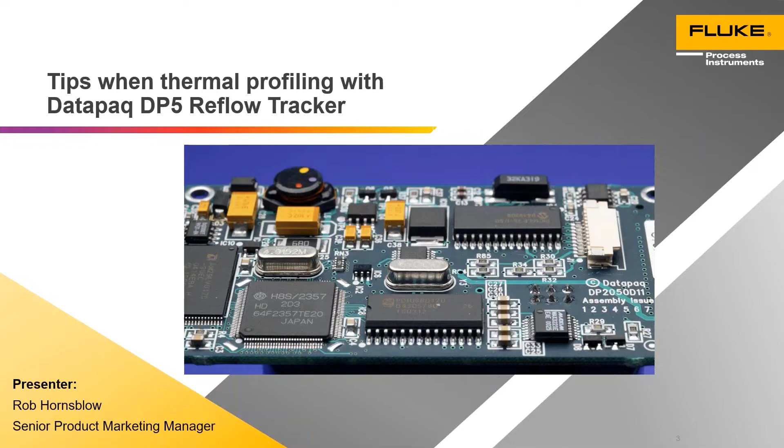So before we dive into the detail around reflow soldering, I do have 2 slides of corporate presentation just to show where Datapaq fits within our larger organization. As you will have noticed, all of the slides have a Fluke Process Instruments logo.

Datapaq, founded in 1984 in Cambridge in the UK, focused completely on design and manufacture of temperature profiling systems. And our R&D teams for mechanical, electronic and software disciplines are still based here in Cambridge, along with our order management team for Europe and Asia.

And we started out making these profiling systems for use in the coating industry, as one of our founders came from that industry, in particular around coating the insides of beverage cans. And the issue there was around coating adherence to the metal, and I don't want to say arguments, but discussions that took place between coating suppliers and applicators when they came to troubleshooting the process.

And I think all of you in the electronics industry see it similarly, where often the expertise of the paste supplier is called on to assist in the process of troubleshooting, and that's directly analogous to the coatings industry where we started. We've also taken that concept and applied it to industrial processes from cooking chicken, right through electronic soldering, heat treatment of steels, through to the high temperature firing of ceramics.

And Datapaq, along with Raytek and Ircon, was brought together in 2015 under the Fluke Process Instruments banner. So we all operate under the Fluke Corporation, which in turn is owned by Fortive, which is a large industrial group with over 20 operating companies and 24,000 employees around the world.

So I alluded to this earlier. Datapaq divides the whole heat treatment world into 6 segments. And today we're really focusing on this one around the electronics industry, and even more, the focus is really around the use of temperature profiling in reflow soldering ovens. We also have systems that can be used in vacuum soldering, vapor phase soldering, wave soldering, conformal coating curing. And some of the points discussed today will be common to those other mass soldering techniques.

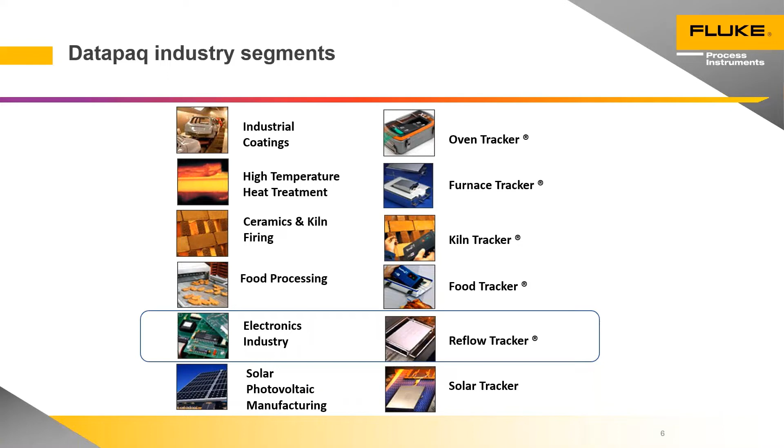Measuring product temperature in reflow soldering is great, and most people are using golden boards to do this with thermocouples attached to them. But there is a degradation in those boards when they're used 10, 20, 30 times. And products like the Surveyor that are available from a number of suppliers have fixed sensors that enable you to get a more stable measurement system. And then at the bottom, a range of accessories for measuring those other processes.

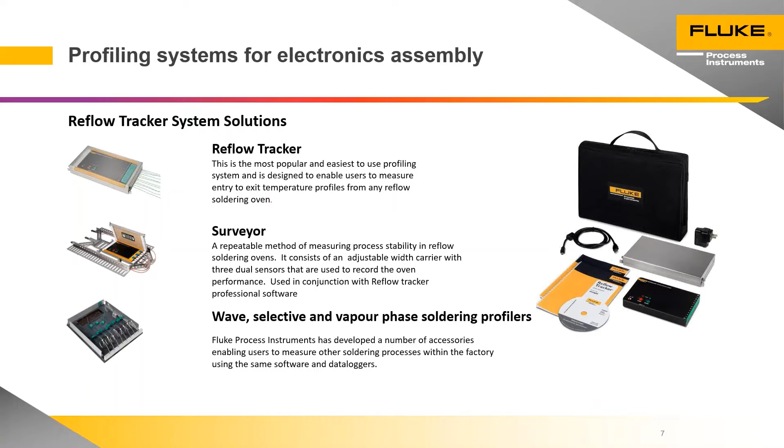Okay, in detail, a quick slide to talk about the data logger. The Datapaq DP5 is a battery-powered data logger designed specifically for use in the electronics industry. It's, I think, the third or fourth generation of data logger for this industry. It has some features that the previous generation didn't, and it was particularly designed to keep cost of ownership low.

So this unit will recharge its battery from any USB outlet via a standard USB cable. It uses off-the-shelf Type K thermocouples that can be obtained anywhere. And the battery itself is user replaceable. So when it does eventually get tired, as we all do, it can be replaced by the user, and no calibration or information in the logger is lost at that point.

Around the battery, this is one of the issues with data loggers. We can fully charge the battery in 90 minutes from discharged, and there's a fast charge controller in there that will measure the current going into the battery and also the temperature of the battery. But if you purchase a very low cost USB cable, you'll find the wires in the cable have a small cross section, and then fast charging through that cable becomes difficult.

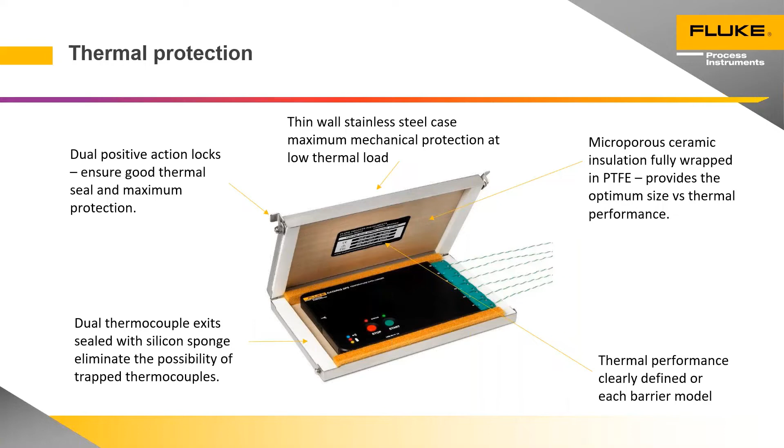The degree to which it's compressed controls the size of the cavities between the spheres. And there's very careful control on the compression to ensure that convection within those cavities is reduced to a minimum. And to reduce any radiative heat transfer within the material itself, the spheres are coated with a reflective opacifier. So that's how the microporous insulation in the thermal barriers is working to reduce as much as possible heat conduction through to the data logger.

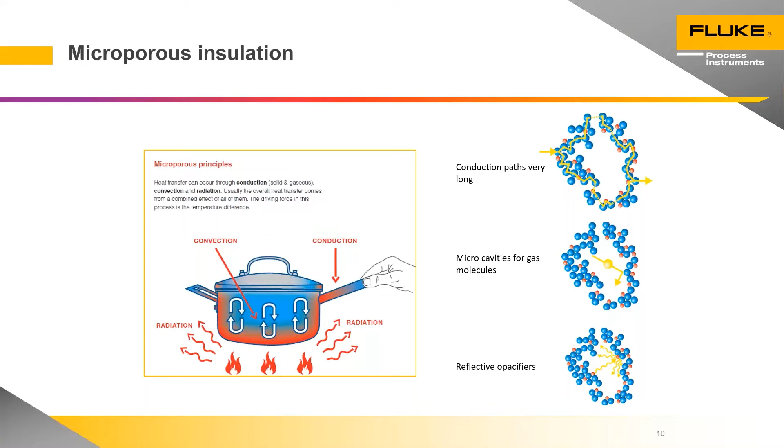When we did exactly the same thing, but placed the data logger on a thick steel plate, a nice cool surface, it cooled down in 3 minutes, or 3.5 minutes. So you can see, once the data logger is out of the end of the oven, place it on a cold conductive surface. If you've got one available, that's great. If not, put it over some fans. You'll cool it down in 3 or 4 minutes, which, by the time you've downloaded and had time to analyze the information, you can be ready to conduct another profile run.

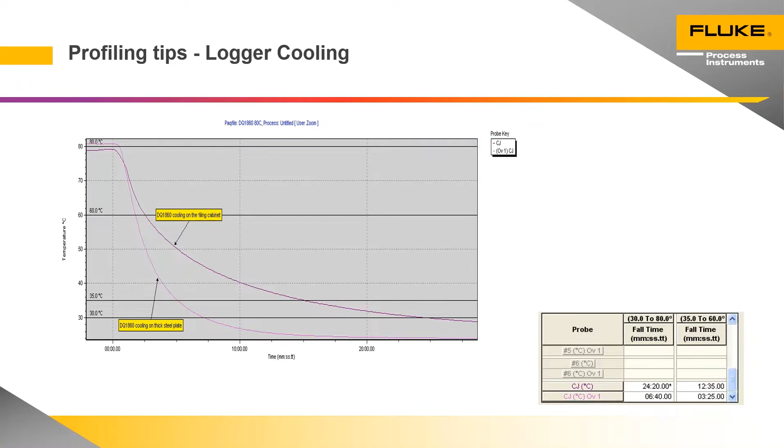And finally, within the software, there is the ability to prevent the logger being reset if it hasn't cooled down. It's not set up by default, but you can go into the options of the software and set yourself up a limit so that if you have inexperienced operators using it and they have a tendency to put the data logger back around the system before it's cooled, you can set this up and prevent them damaging the logger by putting it back through. This will actually prevent it being reset and provide a warning to the user.

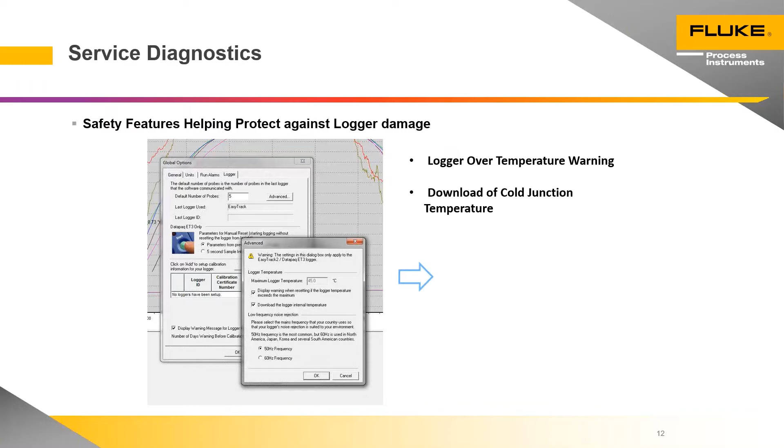Okay, that's my slides on thermal protection. It's an important subject, even though this is low temperature. We do see a tendency for people to overuse the systems.

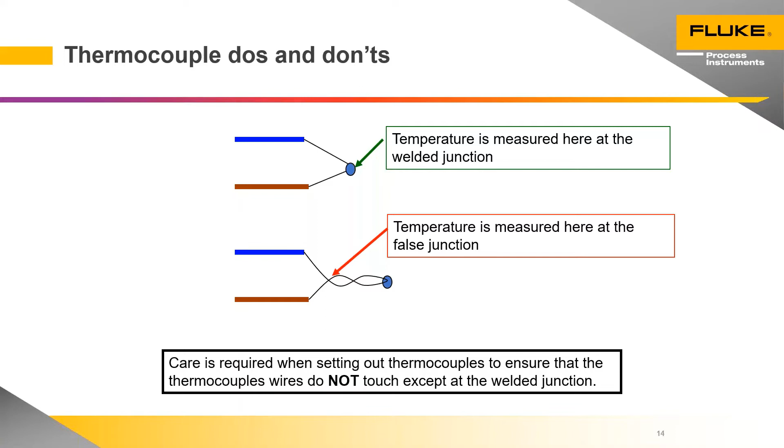Some do's and don'ts with thermocouples. It's typical in the industry to connect a number of thermocouples to a golden board and store it in the cupboard and use that when you come to make another batch of that particular product. When a thermocouple breaks, there's a temptation just to twist the wires together and stick it back on and do the profiling. That works, but you must understand that the temperature is measured at the first point that the two wires of the thermocouple touch each other. So if you've made a long twisted junction, which is nice and strong, and you've done many, many twists, the junction will be measured away from the tip. So just take care. If you get some surprising results that look somewhere between the product and the air temperature, and you've got a twisted pair thermocouple, this is quite possibly what's happening.

One of the best ways of attaching the thermocouple is to use solder. I'll be honest, it's a horrible task. Type K thermocouple wire is very difficult to tin. You'll need an aggressive flux to do it, and you should be using a high lead solder, which in an unleaded solder manufacturing environment is also something that many people don't want to use. But there are a number of people around the world using this. It does provide a very repeatable measurement.

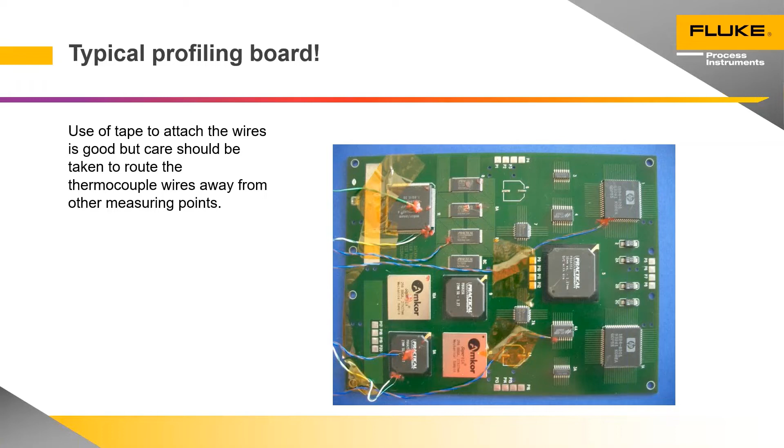Moving on, I'm now going to talk about some of the software features. So we've covered the data logger use, the correct use of the thermal barrier to ensure you're not overheating, how to cool down the logger, how to attach the thermocouples, and now it's how you use the software to get the best out of the results you've obtained.

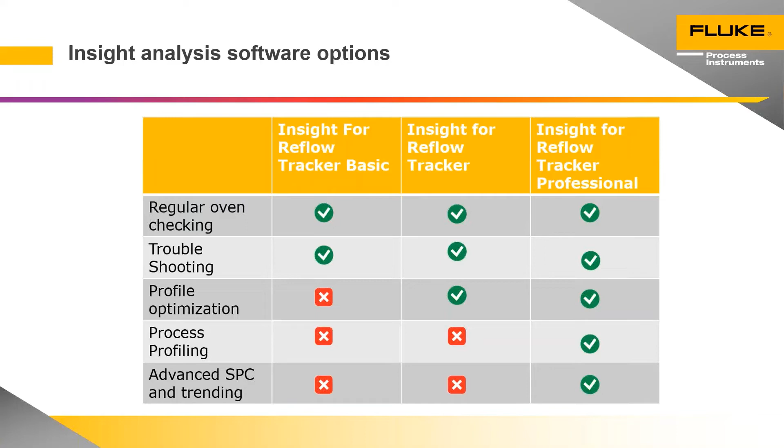There are various software packages available, from the very basic, just for regular oven checking with a time temperature curve, through those that contain some profile optimization or profile prediction, to the professional softwares that have SPC monitoring and profile or recipe setup and calculation systems within them. I'm going to cover profile prediction, recipe generation, and statistical process control in the next 4 or 5 slides. So this is really an introduction to the topic. I suggest that you go and read up around it afterwards if you're interested in using these features in your day-to-day profiling.

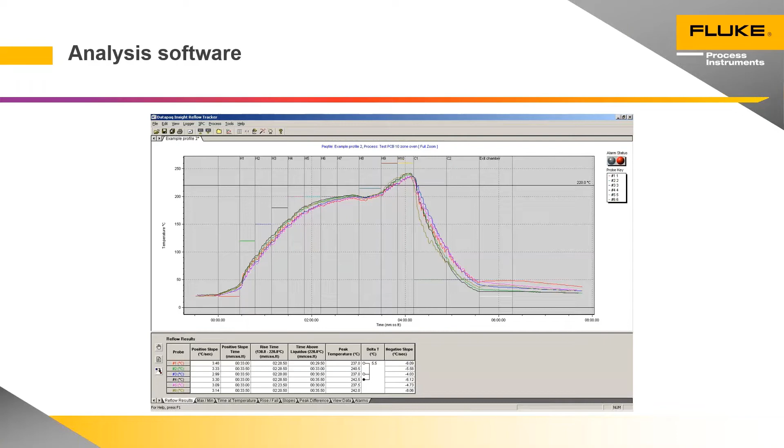Setting up this information around oven zones and recipe settings does take a little bit of time to invest up front in what we refer to as a process file. But once it's been done, that unlocks the power of the software to do profile prediction and the recipe calculations. So this enables you to set up the oven much quicker when you come to change product or change processes. So it's worth investing the time up front to define these oven zones and recipe settings.

In particular, the oven zones. This is the physical dimension, the physical length of the zones within the oven. So it's something you're only going to set up once. They're never going to change. Typically, you would measure the zones, enter them in the software, and save it with a meaningful name, like oven number 3 or whatever it is for your particular factory unit.

Or there is a library of ovens already built into the software, in which you will find some of the most common ovens. The second one on the list is the recipe. Now, at its most basic, the recipe contains the line speed and the temperature settings, which will be used by the software in profile prediction and recipe calculations.

It also includes some analysis. The software can automatically analyze the profile when downloaded and check it against a preset number of alarm levels. So you could set an alarm on peak temperature or time above liquidus. And these can be saved separately from the process file, because typically, if you're using the same solder paste on a number of ovens, you'll be checking the same profile criteria. So they can be saved here as a recipe analysis.

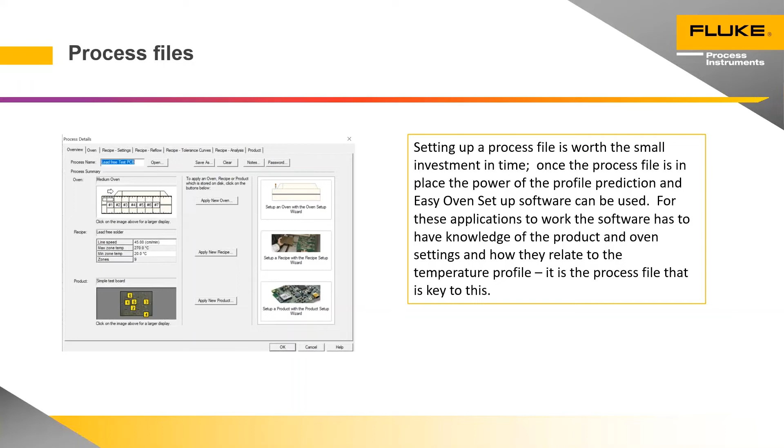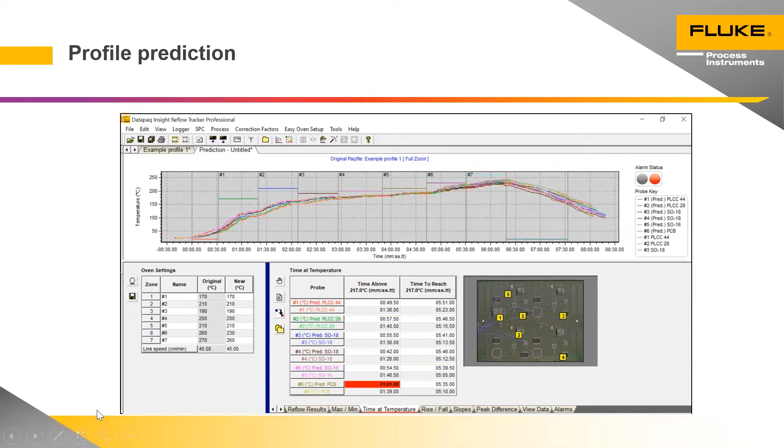It does take some operator experience to get through that and to try a number of scenarios. Another way to do it would be using what we call easy oven setup. Other companies have different names for this particular function. It's a recipe calculation based on the profile you want to achieve. Again, the starting point is the profile you've just measured on the circuit board. And we're back to that slide again. We have a time and temperature graph, and all of our thermocouples are out of tolerance.

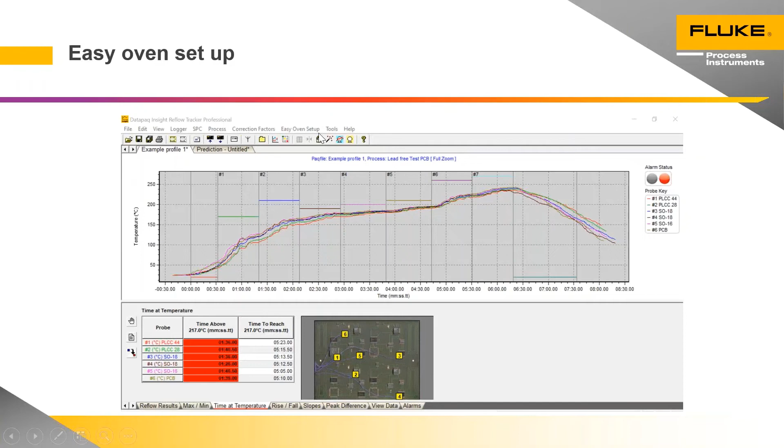If I come across to the easy oven setup, there's an option in here to set up my process limits. So I can now tell the software, I want a profile where my time above liquidus falls between these two times. These are my peak temperatures. I want a simple ramp profile, and here's the maximum slope that I can tolerate during that period. And I'm going to allow the software to look at different line speeds.

The original line speed on this profile was 45 centimeters a minute. I certainly don't want to go any slower than that, but I'm going to allow the software to choose some options between there to see if there's a better recipe that it can find. So it will go away now and do calculations on a number of different recipes and come back to me and propose some options.

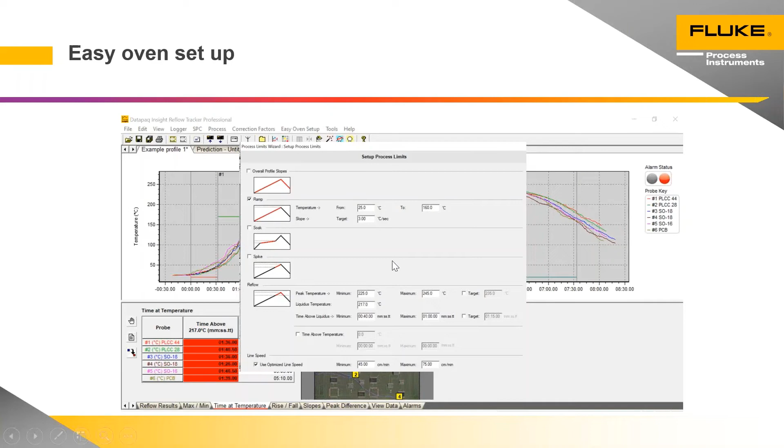So we didn't make the calculation happen. We've just clicked on to the next slide. What I have here is the software proposing some different recipes. And here they are ranked down the side with line speeds and mean temperatures. This is a kind of indication of whether the recipe is a hotter or colder recipe. Typically, slow recipes have lower temperature settings. And you guys know all this from experience.

But this is really to help out people that are having issues when changing or setting up an oven for the first time. Do that initial profile, tell it what you want to achieve, and the software's come back and predicted some settings here. Now, you will notice the first one at the top of the list is now very fast. It's 75 centimeters a minute as opposed to the 45 we were operating at. It does fall within specification. It would allow you to increase productivity.

Other options, I think the first option down here at 45, and this shows maybe some of the weaknesses of automated systems. It's showing a very high temperature on this first zone. I don't think that would be realistic for this particular oven. So you do have the ability to edit the recipes. I could come over here and use this as my starting point, edit it, and then I would suggest you do a confirmation profile.

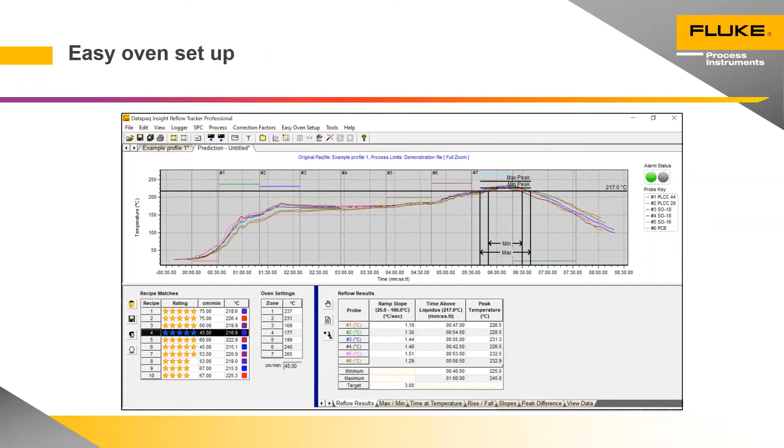So, assuming we've set the oven up for our new product, everything's working well, we're running it day after day, and we want to conduct some trend monitoring. The software has the ability, I wouldn't say this is statistical process control in all its glory. This is a very simplified trend analysis system. But you can go back and look at the results obtained over a period of time.

So rather than a simple time temperature profile for one reflow profile run, we could look back in this example over 20 different files taken over a period of months. And we could look at what was happening, for example, to peak temperature on each of the thermocouples over that time to see whether the oven's gradually becoming cooler or hotter, which might indicate a maintenance requirement.

Before we look at this, one thing just to say, if you're using a golden board to obtain this information, be very careful because you may end up measuring degradation in the golden board rather than changes in your oven settings. So before you start any statistical or trend monitoring, make sure that your measuring system is stable. The measurements have to be repeatable before you can do any analysis.

Okay, so assuming we've got a stable profiling tool and we've conducted a number of profile runs, you would probably do this on a fixed recipe. So this might be a daily thing. First thing in the morning, set the oven to a fairly cool recipe, the same setting every day, pass the tool through it, measure the temperatures, and then compare them that way. And the reason I say a cool recipe is that you can then set it to your operating recipe, which will be hotter, and ovens heat up far quicker than they cool down.

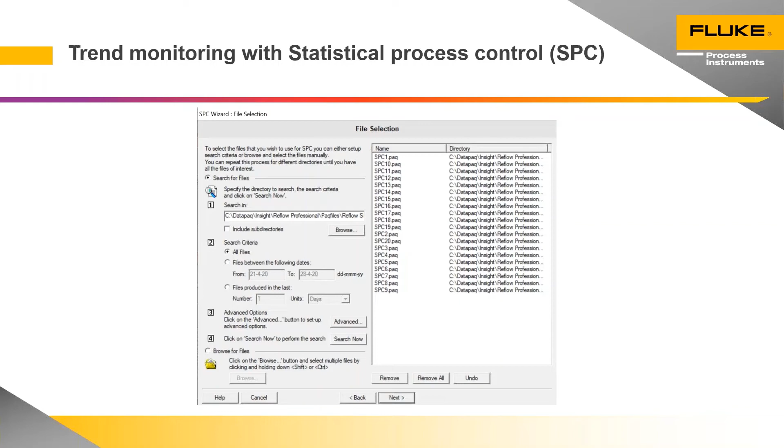So we've selected which files. You could select them over a date period or the last 10 files that you've run. The next step within the wizard is to check which of the analysis fields you want to measure. So this could be time above liquidus. For today's example, I've taken maximum temperature.

So I've taken those last 20 profile runs. I'm going to look at maximum temperature. The software proposes some upper and lower limits based on the temperature that it finds in the first file. You can override these with your particular control limits that you have on maximum temperature.

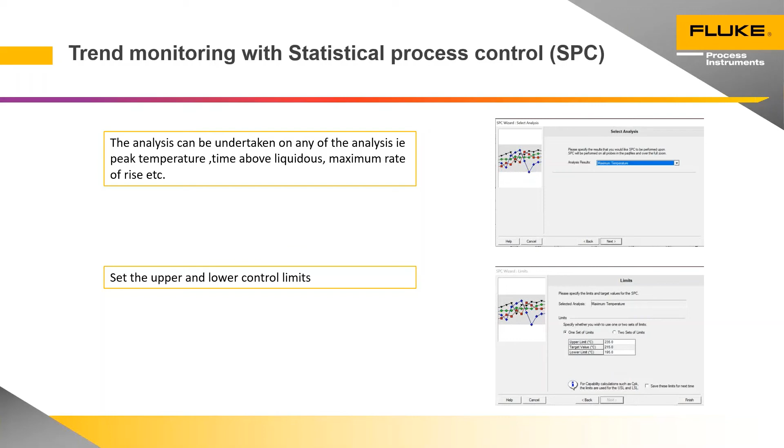And then you move on to the results graph. It looks like nothing else that you've seen in the software to date. What we're looking at now, each one of these points here represents a temperature profile taken. So this one was taken over a period of months, some years ago. We can see these 20 files, each one of these points represents a paq file.

And for thermocouple number 4, this one here, we can see the peak temperature measured each day varies quite dramatically. It's generally below the target, but it does vary up and down. That's got quite a wide variation. If I look at the green trace, number 2 here, I can see that there's much less variation. It's a bit closer to the target temperature, more stable results.

And these are reflected down here in the calculated CPK values. So these are measurements of stability of the process and ability of the process to meet the specification required. The exact calculation is detailed in the help text, but you can see here, thermocouple number 4 is a very low value. It's not particularly stable and it's not particularly close to the target.

Now, maybe that thermocouple is on the edge of the circuit board and you expect a bit more variability, or maybe it's poorly connected, or maybe it's a twisted junction and we're looking at variation due to the fact you twisted the wires together. So make sure you've got a stable measurement system before you start using the SPC.

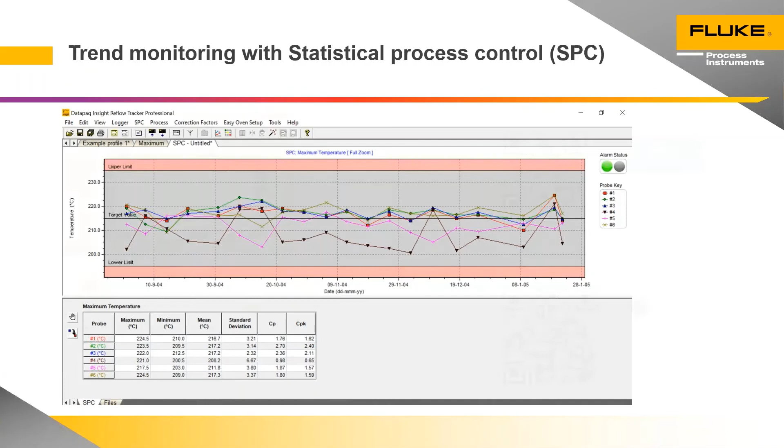One final thing before we go. There is an ability within the software to share results files with other members of your team. You can do this via email. And now we do have a basic viewer available so that if you send the Datapaq file to someone else who doesn't have the software, they can freely download an app. It will run on iOS or Android platforms, and you can do a basic analysis of a graph.

You can zoom in and out. You can look at the individual readings, turn thermocouples on and off, and reshare it. You can email it and share it on from mobile platforms.

And just to share with you, we are developing this app further. So later in the year, this will make communication with the data loggers via the Bluetooth that I spoke about earlier. So you will be able to reset, download, and do thermocouple checking or real-time readings even using mobile platforms. So we can get rid of the need to carry that laptop PC down to the factory floor every time. You will be able to use mobile platforms to interface directly with the data loggers.

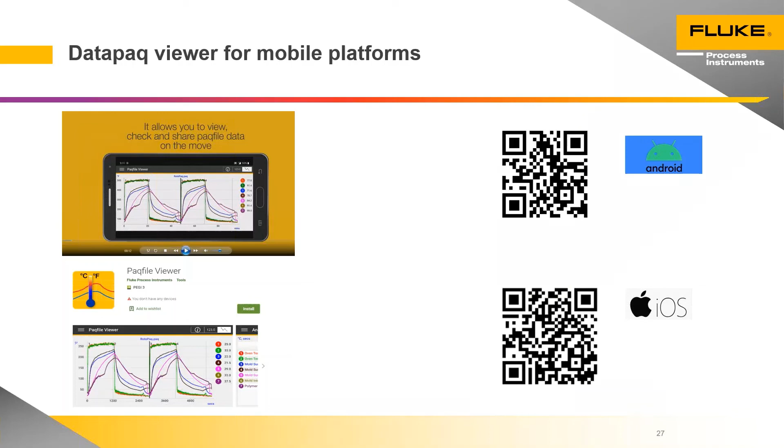Okay, that brings me to the end of my presentation for today. I hope some of it was useful for you. I hope some of the notes around ensuring the loggers are cooled down between use, some of the hints and tips there with the thermal barriers, you'll find useful.

And I await Matthias or Stuart to share with me any questions we've had in. Thank you very much for your time. Yeah, Matthias here. Thank you very much, Rob, for the very interesting and fruitful presentation. From my side, you mentioned a lot of details what my customers also frequently ask me during my presentations and discussions on site.

And additional to my comment, here are the questions from the attendees and the community. One is how to make an SPC for a specific temperature, as for example 100 degrees, and it's not the maximum and minimum temperature. I think they set up a special point in the software, in the profile, and then they want to create an SPC report. So is it that you want to measure the time above 100 degrees or the time taken to reach 100 degrees? Here it is at, for example, 100 degrees.

Okay, so in the drop-down menu, which I didn't show, so in the SPC analysis where I chose maximum temperature, within there's a drop-down list, and you can choose, I believe, time above temperature is one of the options in there.